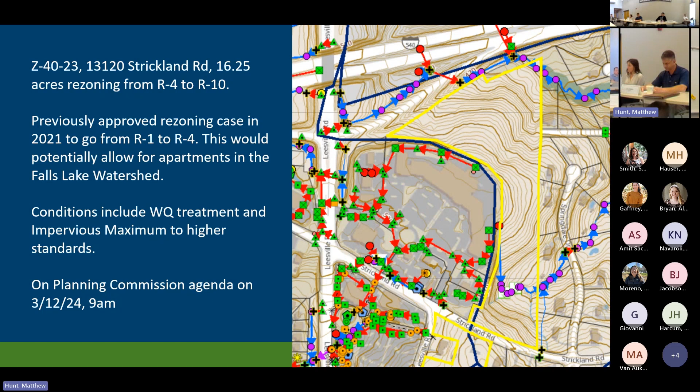Do you have any other updates? All right, next one is one we've talked about a few times, Z3523 on Gorman Street in the southwestern part of town, off of Gorman Street near the end of Ferry intersection, just downstream of Johnson. This is for affordable housing, a 17.8 acre site, and Partners for Environmental Justice came out against affordable housing there because of the environmental impacts.

It's going to public hearing at city council the afternoon of March 19th. Per planning as of yesterday, they're looking at conditions that would restrict development to 3 acres with increased tree conservation areas, so only 3 out of 17.8 acres would be developed. That's once again an unsigned petition, so nothing's set in stone yet, but that's what they're looking at to modify the case at the public hearing on March 19th. They weren't sure about the exact standard for tree conservation, but right now tree conservation areas are about 10% of the site, so it'll be closer to 20.

Why doesn't PEJ support this, do we know? Their letter pretty much went through the environmental impacts and the issues of putting affordable housing in an environmentally sensitive area—they weren't on board with that, but I can forward the commission that letter. That was submitted before the condition to limit development to 3 acres, so their position was back in October, I think, when they made that letter.

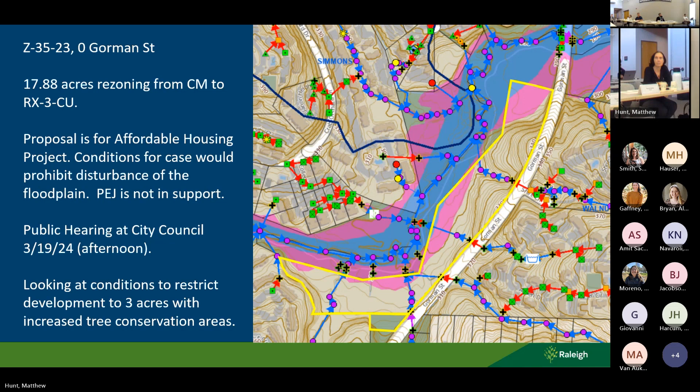And then the next one is a case we talked about last month, it's still fairly new, it's Z-28-2023. It's off Harden Road, kind of in close to Northwest Raleigh, getting there near the Lake View Trail area. And it's essentially at Harden Road and Blue Ridge Road here, which Lakeland Trail is kind of off screen right here. If you ever drive on Blue Ridge Road, this is one of the last undeveloped tracts on Blue Ridge Road. It's about 7 acres, looking to do apartments.

And it was discussed at transportation and transit, and the majority of the conversation at the Transportation and Transit Council Committee revolved around issues of people that live in the apartments heading through this downstream residential neighborhood. And there was a little bit of discussion about stormwater management.

The applicant, before it got to council, had already offered treatment up to the 100-year storm for rate control for downstream properties, because there are some issues of yard flooding and severe erosion downstream, but no structural flooding. But the neighbors had asked the transportation committee about more than the 100-year storm, and discussed possibly the 500-year storm, or doing the 100-year storm treatment back to back.

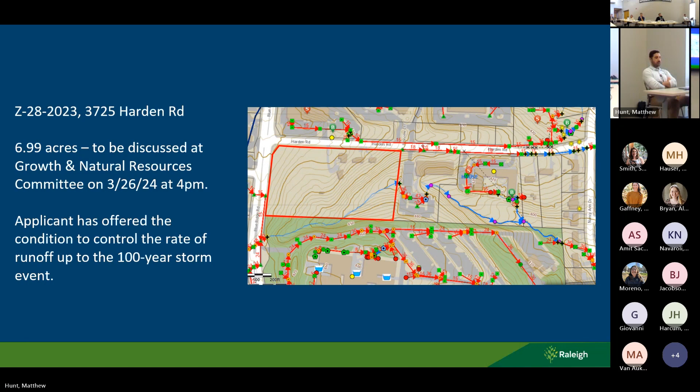And then Tuesday night, they had the second discussion about the New Bern bus rapid transit rezonings. As you recall, council held a special public hearing on January 30th about this to take neighborhood public comment. And actually, one of the crazier times, we had exactly 35 for, 35 against at that meeting. They did not take public comment this past Tuesday and just discussed it at the table.

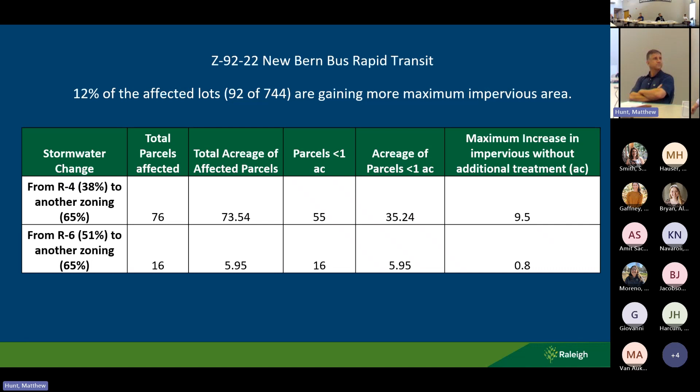Essentially, and I've got their list of recommendations on the next slide, but essentially they approved the transit overlay district with the exception of a few areas, and did not act on the rezoning for all these properties as of yet. We're gonna have more discussion about this on April 2nd, in the evening as well. So this is kind of what we showed you last time about the amount of parcels, so if they were rezoned, the amount of maximum impervious that they could get access to.

But what they approved on Tuesday night was they applied the TOD, or Transit Overlay District, for all the properties except ones that are in a neighborhood conservation overlay district. They took those out of the transit district, any state-owned properties and properties that had a submitted public request for a removal from that rezoning. Three properties that they know of, affordable housing projects coming in this corridor, they went ahead and rezoned.

So the plan is in April, they will talk about rezoning the rest of these properties, whether that's on the table or whether we should start over. There's been talk of splitting it up from the Beltline east and then doing anything on a neighborhood by neighborhood basis. And we're talking about that on Tuesday night, so. And no stormwater issues came up in any discussions about that.

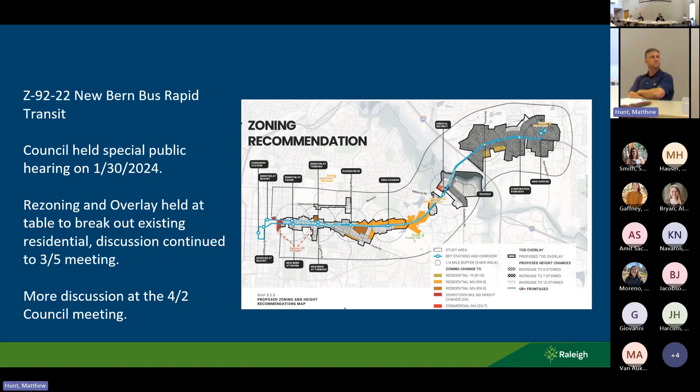All right. Okay. All right, thank you so much, Ben. Okay. I apologize, I have to leave. One of the functions of being a priest is that emergencies happen. My church member's dying, so I have to go give last rites. So, Graham will lead you from here, and I might not see you until April.

I do believe that's stormwater staff updates. Correct. Yes, we have a new member who's joined us and is here today. I'd like to introduce Seamus Riley, who's our new floodplain management supervisor. He'll be joining Allison Bryan in the floodplain management group, and he comes to us from Jefferson Parish, Louisiana, where he was their floodplain manager and community rating system specialist since 2015. He has a bachelor's degree in biology and a master's degree in environmental science and policy from George Mason University.

He's obviously a new resident to Raleigh. So welcome, Seamus. Glad to have you here. Thank you very much. Glad to be here. Oh, flooding. Yes, I've got some flooding experience in Louisiana, right? So that's the only staff update.

In terms of the commission, Ian McMillan was voted to be on the commission. Unfortunately, he could not make this meeting. And then also Melody Whitford was voted just this past Tuesday to join the commission, but with such short notice was not able to join us today either. So we do have a full commission now officially. So it's good news as well. I'll keep going if that's okay.

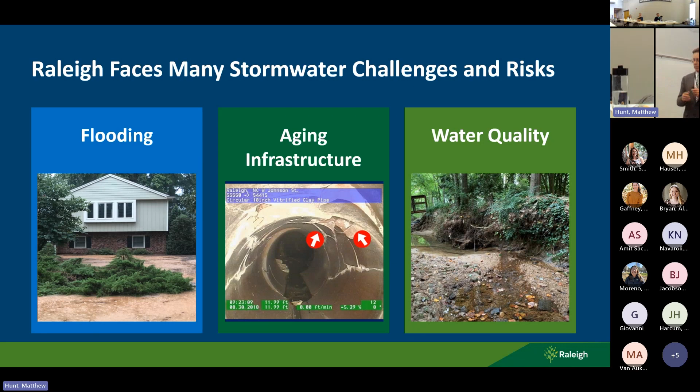And then obviously we've talked a lot about water quality issues, erosion issues, stream bank issues, a whole variety. But we have a multitude of solutions and programs to help address those. Floodplain regulations have been beefed up. We have a very good flood early warning system. We've seen some past presentations on that, as well as our education and outreach program. Lots of system improvements, repairs, replacements, aging infrastructure, increased capacity in neighborhoods.

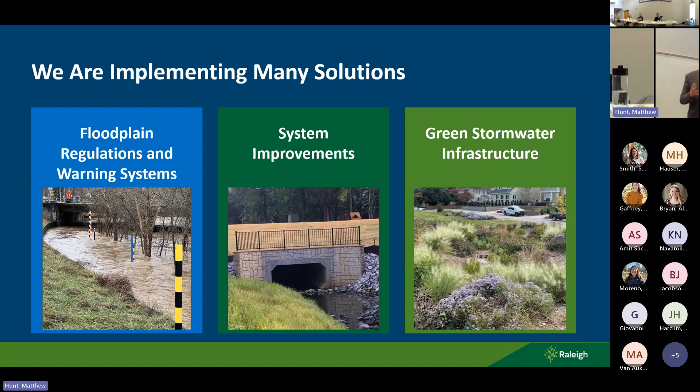And then very proud of our green stormwater infrastructure initiative too, and a lot of good work going on there to improve water quality. And rainwater rewards. You all have been very supportive and involved in that, so appreciate that support. Watershed studies. We've talked a lot about operationalizing equity. We'll be bringing more back on that project to you in just a couple of months. And then obviously you're very familiar with the drainage assistance and stream stabilization programs because you all review those projects, and lots of good work going on there.

A map really of dots with our capital improvement projects, water quality projects, and drainage assistance and stream stabilization projects that are going on all across the city. Lots of good work by our team. And then you can see the bolder lines outlining the ongoing watershed studies going right now. And now we are moving into the Marsh Creek Basin, which will be the next study, where we're already starting to do some field work in that regard.

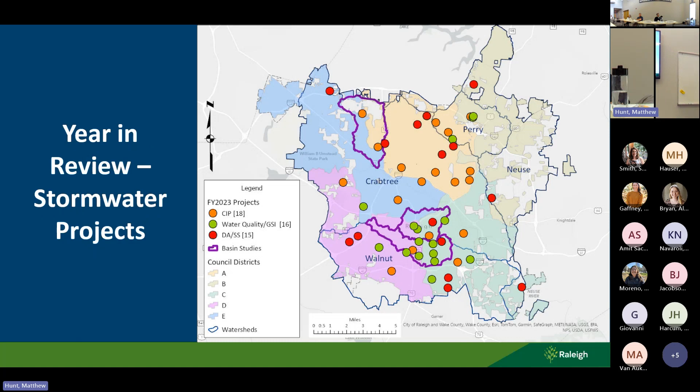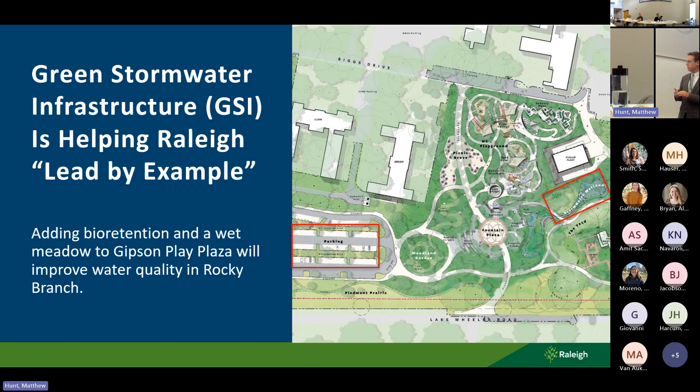Continue to lead by example. The budget includes funding to continue supplementing funding for other departments' projects so that we can add green stormwater infrastructure. An example of that is the Gipson Play Plaza at Dix Park. We added supplemental funding to add bioretention in the parking area as well as the stormwater wetlands in the meadow area. So continue to look for opportunities to do that. Lots of good collaboration going on with other departments, transportation, parks, and facilities to look for additional opportunities to do that.

And you've seen presentations in the past on our stormwater maintenance crews, who continue to do an excellent job stepping up in terms of the maintenance of pipes that are being inspected and cleaned, catch basins cleaned, street sweeping. This is one of the new recycling trucks that really improves the efficiency of the cleaning program.

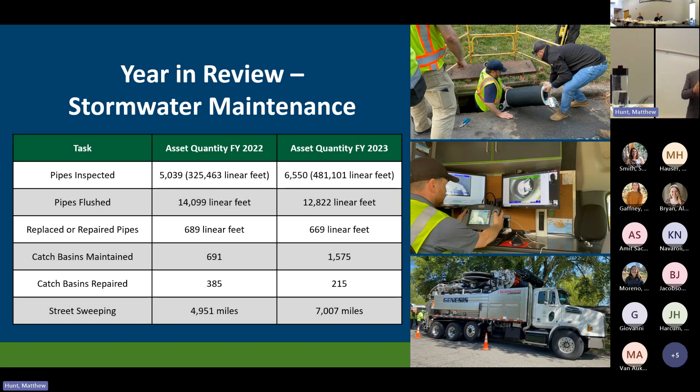So lots of excellent work going on right back here out of this facility, and you'll all tour that. So excellent work with that.

This is supported by our stormwater fee, which is an impervious surface-based fee, broken into residential and commercial categories. The existing fee is based on residential tiers that have a threshold of impervious area. The most common one is tier 2, and that's $7.36.

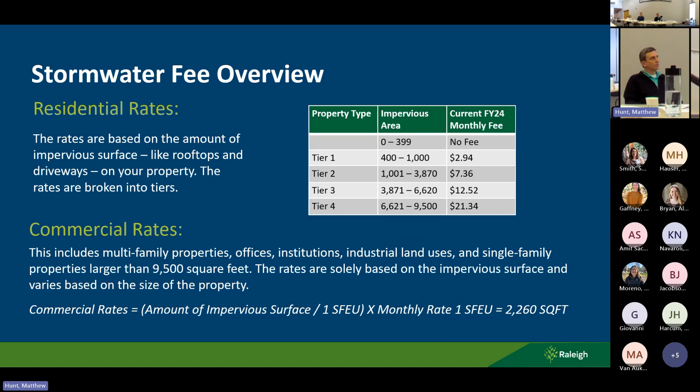That's our standard equivalent unit fee per month, per home in that tier 2 category. The commercial rates are actually proportioned to the amount of impervious area, and I'll give an example of that based on that 2,260 square foot equivalent unit.

Over time, for the first 16 years of this program, we had one fee increase, and that was in FY 2017. In FY 21 and 22, we had slightly larger increases to catch up for not having a rate increase for a while. Then more recently in 22, 23, and 24, which is our current fiscal year, we've had more modest increases, 18 cents the last 2 years.

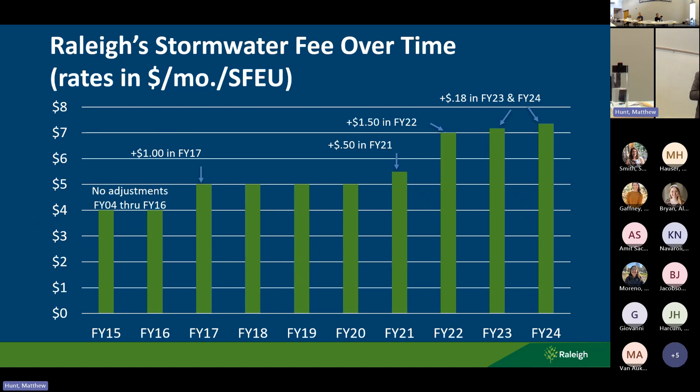So we believe we are kind of caught up in this area where we can continue with modest increases to adjust for operating costs, inflation, and some program expansion, which we do have one suggestion this year that I'll get into. This year for FY 25, we are proposing a 29 cents per equivalent unit per month increase in the fee, and that comes out to be a little bit less than 4% increase.

That would take the $7.36 per month, which is the current fee, up to $7.65 per month. You can see what our projections show that will do to the budget.

It takes it from about $36.4 million to $38.9 million. And the capital improvements budget would go from 13.1 to 13.8.

Now, there are two factors that go into this revenue. One is the fee, which we're proposing a 29 cent increase, but built into that number also is a projected increase in the amount of impervious areas. So we're growing - there's typically a 1% to 2% increase in impervious area any given year. So if the fee increase is 4%, this increase is about 6.5% overall because of both of those factors.

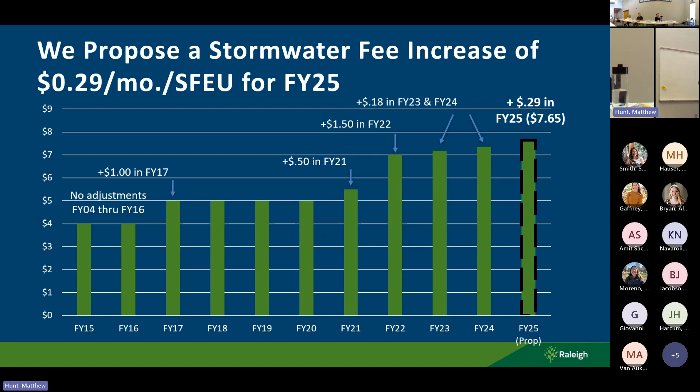There's what it looks like in terms of the bar chart for FY 25, adding the 29 cents compared to our past rates.

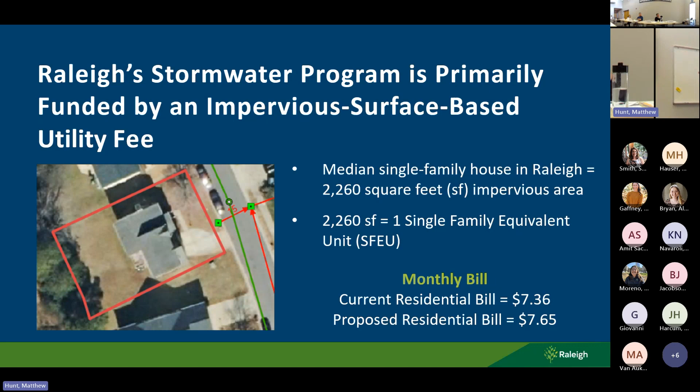Quick reminder: the impact on a residential bill, typical median single-family home, would be from $7.36 to $7.65 per month. And then if you look at an example of a commercial bill, that property is a commercial building with parking all around it, has over 47,000 square feet of impervious area. Using our equivalent unit, it's about 21 equivalent units. So their monthly fee would be 21 times the $7.65. In this example, that would take their current fee from $154 a month to $160 per month, for example.

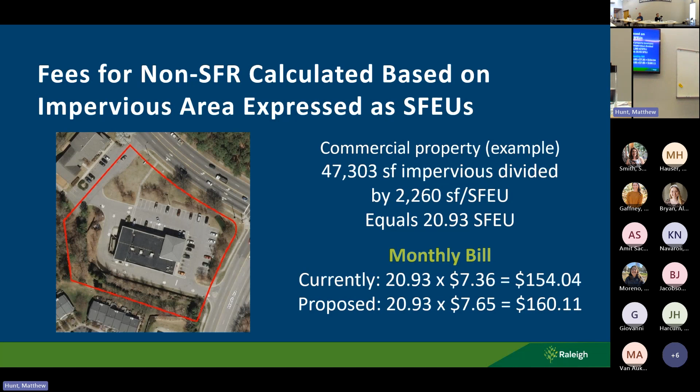Looking at where our revenues come from, because the majority of impervious surface in Raleigh is associated with commercial properties, and that includes, for example, apartments, which are considered commercial property when built all together as one unit. So we get about two-thirds of our revenue from commercial properties and about one-third from residential properties.

Which, for example, property taxes is more like 50-50. So receiving revenues from a stormwater impervious type of fee does put more of the burden on the commercial properties who are generating more runoff because of the impervious surfaces that they have. So it is a difference versus stormwater programs that are funded by property taxes.

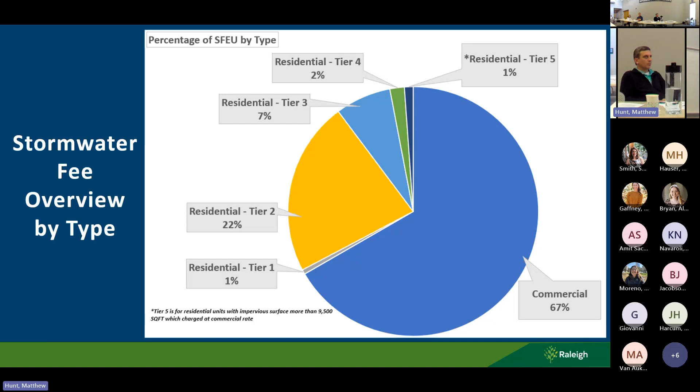But as we've discussed before, we are working with the finance department to implement a debt service strategy that we will start using. We believe this is a more fair and equitable way of implementing stormwater improvements, because when we build, especially the major CIP projects, this is infrastructure that when you build it will last 50, 60, 70 plus years.

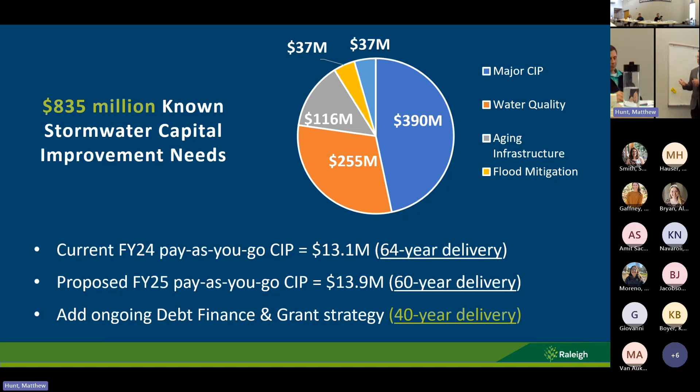So why should people that live here now be the only ones that pay for that infrastructure that's going to last much longer than this? If you use a debt service financing strategy and pay it off over 30 years, then the users for the next 30 years will be paying for that infrastructure. So that's the strategy. It also gives us a lot more flexibility in terms of how many capital improvement projects we can implement, as well as the size of some of the larger projects.

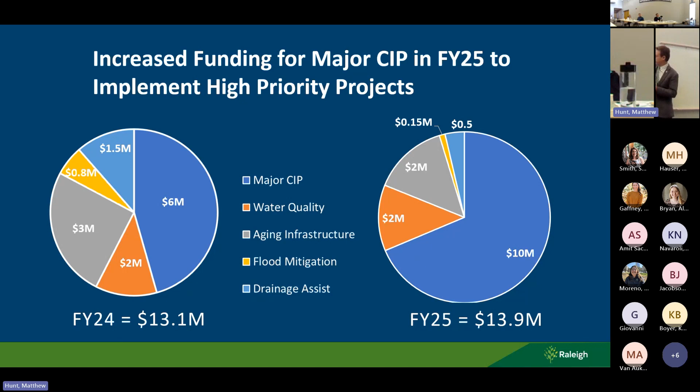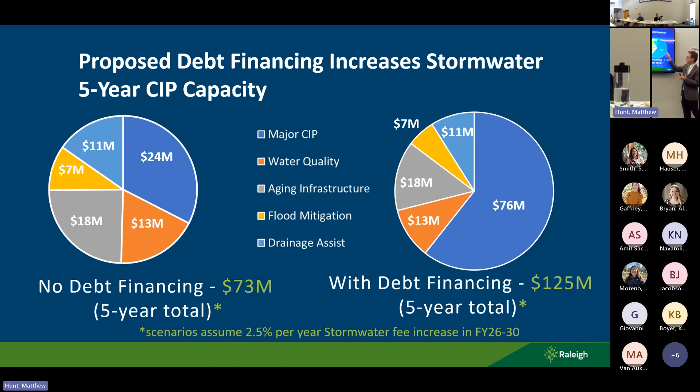Some examples of that: Rose Lane, which is a $10 to $12 million project. If we weren't using debt service, it would be very difficult to fit that into pay-as-you-go, just one year's budget. We wouldn't be able to do much of anything else.

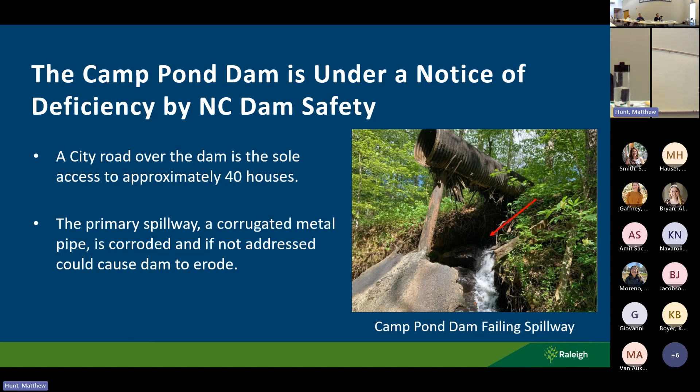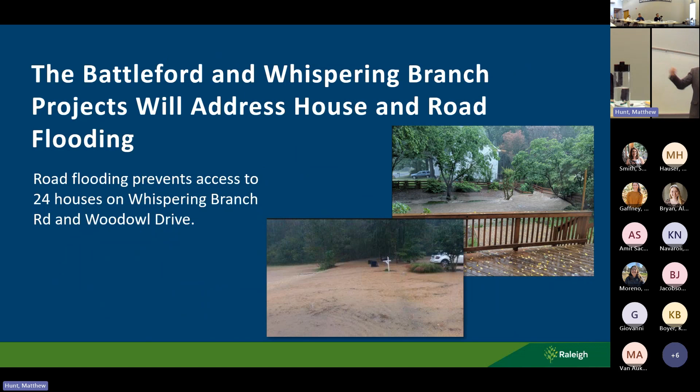This is another one that we're moving forward, about a $5 million project, currently under design. You heard a more detailed presentation on this a few months ago. Battleford and Whispering Branch is another project where the streets get flooded and homes are cut off - that's their only access. So that's one of our major CIP projects.

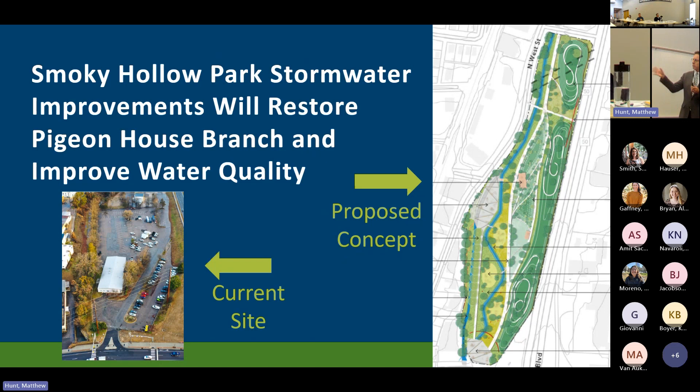And then Smoky Hollow Park, which is a parks project with about $13 million in the parks bond. But Stormwater is proposing another $5 million as part of a revenue bond because of the significant stormwater elements to this project. We're restoring the floodplain, daylighting Pigeon House Branch, which is the most impaired stream in Raleigh, taking it out, restoring the meanders, restoring the riparian buffers, taking buildings out of the floodplain, and really improving water quality overall. So significant water quality benefits to this project as well.

All of these projects are currently underway, in design or moving into the design phase. So the debt financing, we're proposing to put in place in FY26 as these projects go to construction, allowing us to move forward with construction on all of these projects together, where we could not have done that with a pay-go strategy.

One new proposal, and I think I mentioned this last month - we are adding in this FY25 budget a proposal for a 4-person green stormwater infrastructure maintenance crew. This would be brand new. Parks has been helping a little bit with maintenance of this and charging us back through our work order system, but we've been contracting most of it out to a contractor to do the maintenance. This would bring our capabilities in-house, allowing us to get additional expertise and build this expertise.

The model we're using is similar to how the stormwater utility pays for positions in transportation stormwater maintenance crew, even though they're in a different department. These positions would be housed in the parks department, but we would pay for those 4 positions and work closely with them to help set their priorities and work schedules. That's about 11 cents of the 29-cent increase being proposed going toward that maintenance crew, and it's not just the people, it's the equipment, trucks and other equipment.

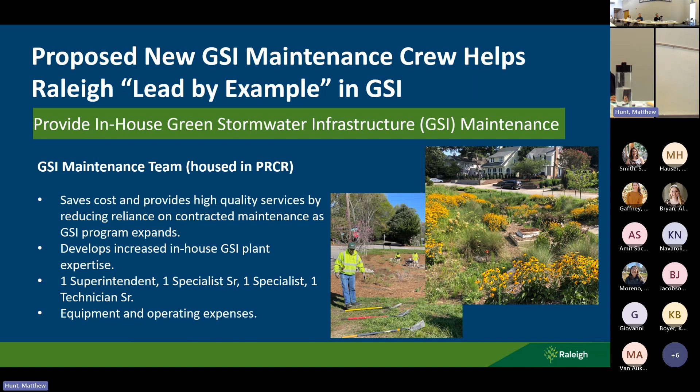So that's the presentation, glad to answer any questions. At this point, you may provide a recommendation for consideration by City Council. As I've mentioned, we'll be presenting this to City Council at their work session on March 11th, but any final rate approvals would not occur until City Council adopts the overall fiscal year 25 budget. The work session Monday is just to give them a preview and get preliminary feedback from City Council.

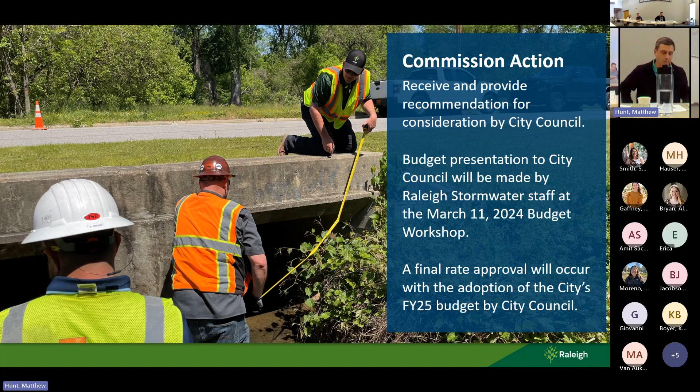I'm a senior engineer in the water quality section within Stormwater, and I'm excited to be here today to provide an update on the Smoky Hollow Park project. I'm also joined by Gary Claiborne, the current manager of the project in the Parks department, and also 2 members of the design team, Jonathan Smith with Tetra Tech and Emmett Purdue with Ecosystem Planning and Restoration. Before I hand it over to Gary to talk about the background of the project, I just wanted to reiterate the collaborative nature of this project.

As I mentioned, Parks has been managing it since 2017, and we've been involved even before the schematic design phase, but especially through the schematic design phase. Once the schematic design phase is finished up this spring, management of the project will move to Stormwater. So we aim to keep that collaborative effort going, and we'll be working closely with Parks to ensure the success of this project. With that, I'm going to hand it over to Gary.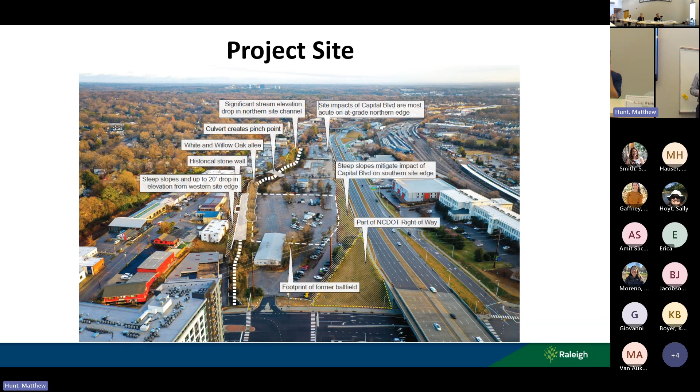Other significant features include there are lots of utilities in there. And because of the use of the site, going back again 100 years as a maintenance facility, there is groundwater and soil contamination within the site, primarily in the center portion where the service station is. There's a number of underground storage tanks, which are going to be removed this summer as part of an advanced remediation effort of the project. But one of the goals of the project is actually site remediation in conjunction with the park construction.

So just an overall project timeline—I don't want to go too much into detail, but going back to 2017 through 2020, the city went through a series of site studies, including the initial work understanding the site contamination issues. In 2020, right at the start of COVID, is when we started the concept design process, and we went through a rather rigorous public engagement process, although at the time it was virtual for a lot of it. But we have received a lot of participation.

There have been hundreds of people who have attended meetings, virtual or live, and also worked on our surveys. In November 2022, the concept plan was approved by the city council, and then that started the schematic design process, which really started last summer. It's funded primarily by both the 2014 and 2022 parks bonds.

Long-term, the eventual timeline—we do hope that the goal is for park construction to be completed by the end of 2027.

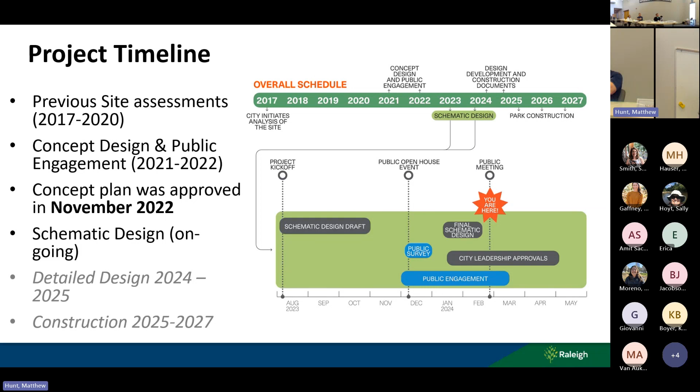In terms of the concept plan, just so you understand a little bit of the background, we did go through a concept plan process where the design team came up with 3 design concepts, all really centered around, to a greater or lesser degree, how Pigeon House Branch was treated.

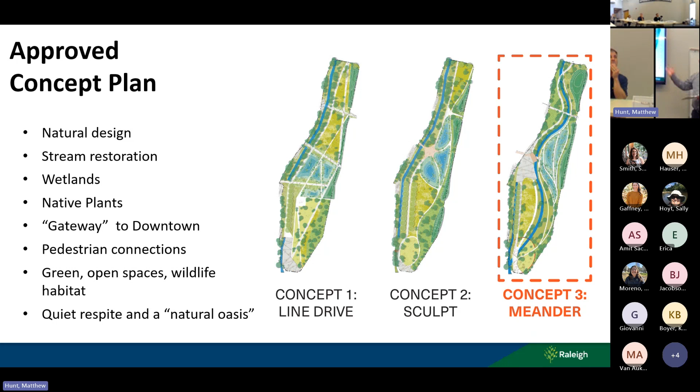Concept 1: the Pigeon House Branch pretty much stayed in the existing condition as it is now, with some restoration of the stream bank in the daylighted sections. Concept 2 stays in the same alignment but will daylight the section that's currently underground. Concept 3 takes the stream out of the existing alignment and starts to flow through the site in a more natural condition. In the end, for our public engagement process, concept 3 was the preferred alternative.

So this is the current schematic design plan. We did have an open house this past Saturday presenting this. This is what is going to go before the Parks Board in a couple of weeks. It's where we took that concept design and really started to refine the design, really get to the details in terms of how the entry plaza looks, how the main greenway path, which goes from south to north, how that really starts to work with the stream and the secondary pathways.

You'll see here the Pigeon House Branch flowing through the site, as mentioned, and then there also is a constructed wetland feature as well. So there's more details to this, but I think those are the important topics to cover in terms of the stormwater issues.

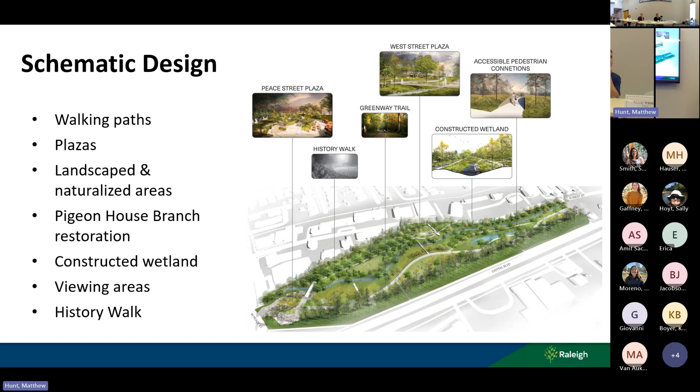Thank you, Gary. Again, Emmett Purdue. I'm with Ecosystem Planning and Restoration, and I've been tasked with the stream restoration portion of the project. As Gary alluded to, through the public engagement, the community really emphasized the key elements of the park to be stream enhancement, natural areas, and what water quality benefits we could strive for.

So with that, we have the existing Pigeon House Branch, which, as Gary mentioned, is a highly incised and entrenched system in an urbanized watershed. We have the existing park constraints, so think underground and overhead utilities, the culverts at Dortch and then at Peace. And then we had to also layer in the additional park elements, the amenities that the community also desired to be a part of the park. So that set the boundaries of where we could work and what we could do.

And so what we then did is divide the stream portion into a northern and a southern portion. And while the southern portion does appear to be a meandering system, we don't actually have the full horizontal expanse to allow it to function as a meandering system. But what we were able to do there is provide some more expansive floodplain benching that promotes riparian health and gives the site some of the flood resiliency that we wanted as part of the project as well.

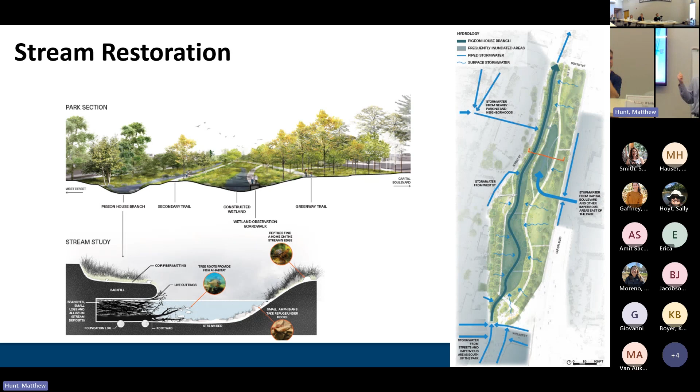The stream itself will incorporate several different types of in-stream structures. There'll be wood and rock structures that will promote pool development, bed form diversity, and in-stream habitat for bugs and things like that to allow some of the animals to come back. They will be placed throughout the whole system to really promote turbulent flow, because again, this isn't a meandering system. So we need turbulence in the stream to provide the energy dissipation that the system requires to become a stable system in this configuration. So that's the overview of the design approaches.

But in terms of the ecological benefit, it's easier to see when you look at the stream change, the actual footprint, and then the land use change within the park setting. On the left, you have the existing conditions. On the right, you have the proposed. The main takeaways are roughly 820 feet of this system, as Gary mentioned, are either in a hardened lined channel or in a culvert. We are proposing to remove all of that and have a completely open channel from Peace to Dortch.

Additionally, as you can see, there's significant impervious area within the park footprint. We are going to remove a lot of it and change it back into some form of natural plantings or open water. Those two components alone will allow for infiltration and retention. It'll also allow the construction of the stormwater component that Jonathan's about to speak to, which will really allow the design to achieve the ecological benefit that the community desires.

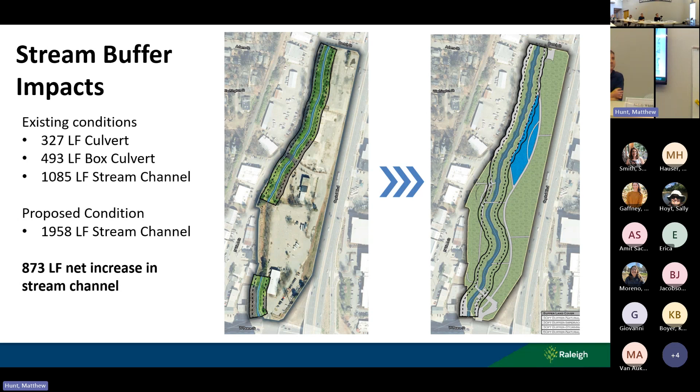Hi, as Emmett mentioned, I'm Jonathan Smith, the project manager for Tetra Tech. In addition to the water quality benefits afforded by the restoration of Pigeon House Branch and the removal of the significant amount of impervious area, the project design also incorporates a stormwater management device in the form of a stormwater wetland, which Gary and Emmett both pointed out during their portion.

And this is able to treat a 63-acre watershed, which originates in the Seaboard Station area, incorporating very significant imperviousness. I think it was 61% impervious for that drainage area. It enters into the project site under Capital Boulevard and flows from east to west, right in the dead center of the project.

Now the space and the allocation for that stormwater wetland is a bit constrained. It's constrained horizontally by the presence of a north-south sewer interceptor, as well as Pigeon House Branch and the proposed greenway for the project. And it's constrained vertically by the deep elevation of that culvert, which comes in 54-inch RCP, and then as well, the new elevation for Pigeon House Branch.

As a result of those constraints, it's a relatively small stormwater wetland, about 5% of what we would typically design for this size watershed. To mitigate the impacts of that, the design incorporates a diversion structure so that smaller flows are routed through the wetland and then down to Pigeon House, whereas larger flows during those higher intensity storms discharge directly through the diversion system to Pigeon House, so they don't flush out pollutants and collected materials and vegetation in the stormwater wetland.

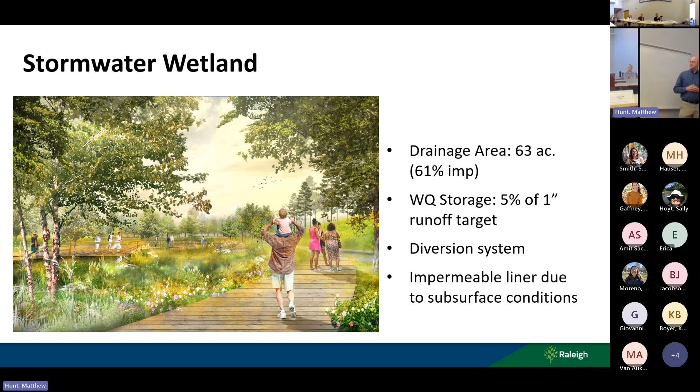Thank you. And with that, I'm going to get more into some of the gathering places that are in the schematic design plan, including the Peace Street Plaza, which is really going to be a grand entrance, almost coming from Peace Street, looking north into the site. And you'll have the newly restored Pigeon House Branch to the west of that, and then Capitol Boulevard's on the right. But in this space, there's going to be some seating, picnic areas, and some flexible programming, such as the ability for food trucks to be there. Also, there's going to be a bridge that connects this plaza over Pigeon House Branch to the western edge.

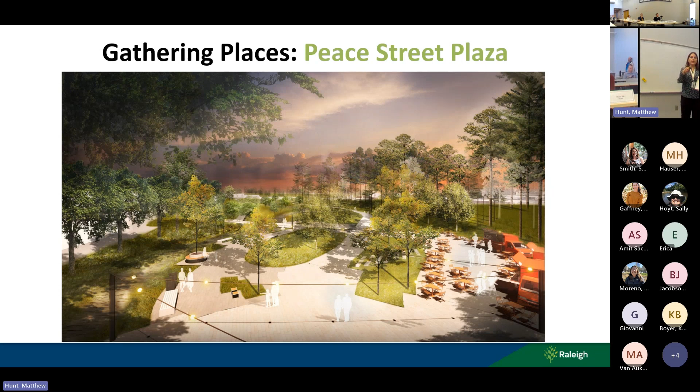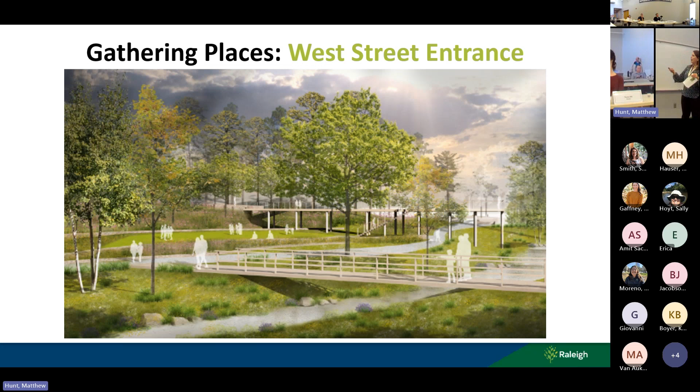Another gathering place is off of Northwest Street, and it's the West Street entrance. It's a bit higher in elevation, so there's going to be an overlook structure, and it's approximately in the center of the site going north. So visitors will be able to have a grand view of the site and be able to connect down to the secondary trails.

And moving into the engagement, Gary spoke to it earlier, but there have been 2 recent meetings as part of the schematic design phase. One in December, which solicited input on the draft schematic design. People thought very favorably of the project. One of the biggest themes of comments was reducing some of the hardscape features. So the West Street entrance, which I just had on the previous slide, actually was reduced in size in order to address those comments. But overall, people were very happy with the project, stayed for a while.

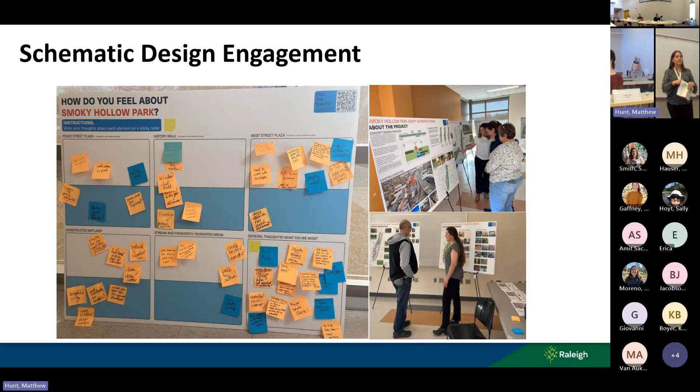There were about 60 attendees at the December meeting, and there was an online survey that had over 350 responses. And then there was just recently a public meeting last Saturday to present the final schematic design.

So funding and next steps, just putting up the funding that we mentioned. It is funded with Parks Bond funds as well as stormwater funds. In the stormwater funding, most of it will come in during the construction phase. And next steps include presenting the schematic design to council. As Gary mentioned, there'll be some service station demolition and underground storage tanks removed, which will start in a couple months. The continuation of the remedial investigations with the phase 3 starting pretty soon. And then the transfer of the management of the project over to stormwater.

And then we're also going to deliver the project through construction manager at risk. So that's actually a first for stormwater. So we're looking forward to developing that RFQ. And then the design development, construction documents, final permitting, and then construction.

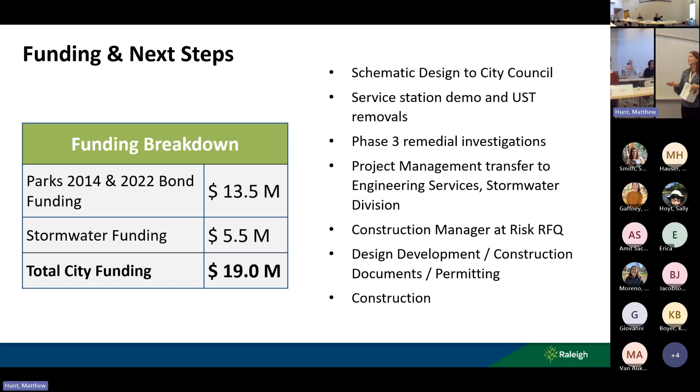Wayne spoke to the recent application that we just put in last week. The funds that were requested as part of this grant application will go towards the construction of the stream restoration. Some of the match funds are what we will be using to construct the wetland. And if those are granted, then we would be looking at being able to set up a grant contract next year.

So with that, thank you, and we're happy to take any questions.

I don't have any questions. I just want to say, yeah, very inspiring and exciting to see that this work's being done. So have you completed any borings on the site yet? Because I know there's tons of bedrock north of there. Many borings. I think 40 or 60 today through the two phases of the remedial investigation completed today.

You know, I'm curious if you were able to figure out where that stream used to be. I know there's probably no photos. So we haven't seen indications in the boring logs that show the stream location. But we have relied early in the process on looking at some very old aerial photos and maps, which did indicate that it was likely further into the site than its current far western location. And early on, you had a survey to choose the name of the park. Yeah. I like the name.

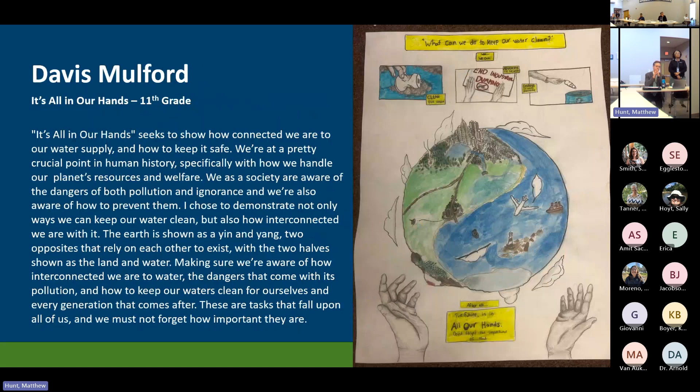I'd be jealous of these kids. Way too many.

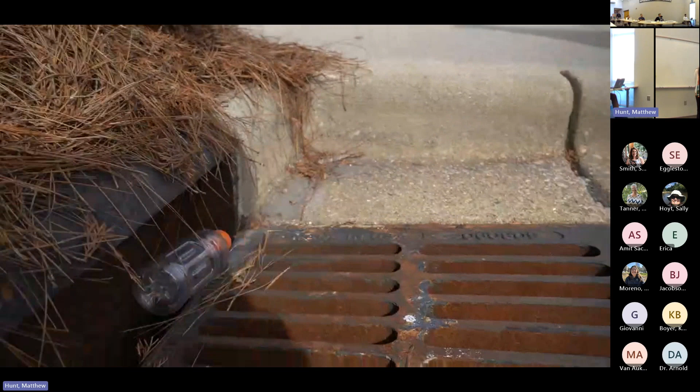Eventually, that water bottle will end up in the stormwater drains to be swept along. On and on it will float, creeping relentlessly closer to polluting our watersheds. Once the pollutants reach their goal, in our case the mighty Neuse River, it can endanger wildlife and reshape waterways, both resulting in catastrophic problems for our lakes and rivers. One by one, bottle by bottle, you too can save the earth from its polluted doom.

Whether it be plastics, pet waste, or pesticides, what gets in our water affects us and the wildlife around us. Help protect our community today by preventing harmful runoff.